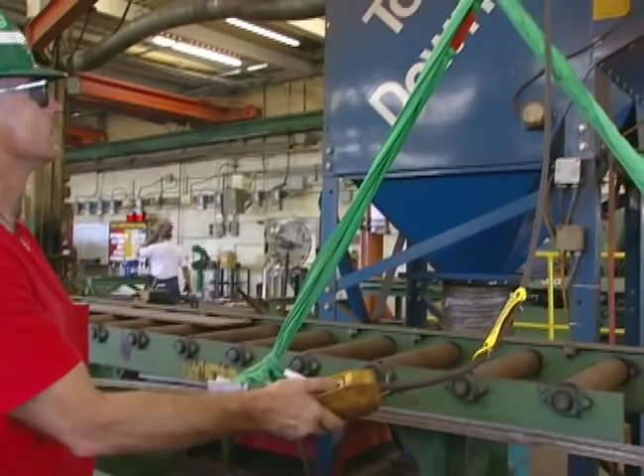Lift-All, the world's largest manufacturer of slings for the material handling industry, presents Safety in Lifting. This presentation is designed to make you more familiar with the wide range of material handling slings available to help you lighten the load, and to highlight procedures that can improve safety awareness for sling applications. In short, to provide life-saving knowledge for field personnel.

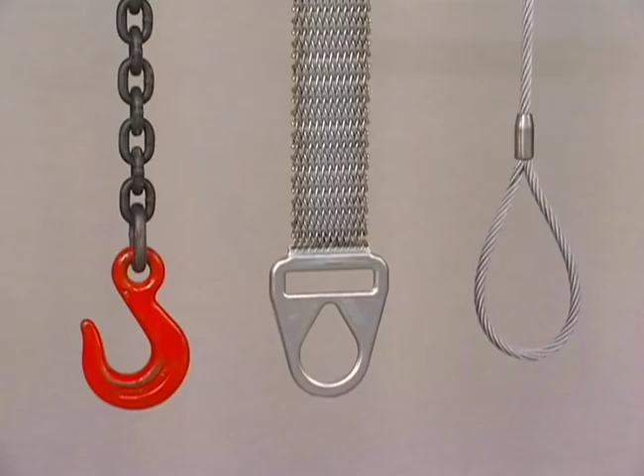Slings can be divided into two basic categories: those made from synthetic materials and those made from steel. Synthetic slings are often used where protecting the load is a major concern. They are lightweight and easy to use, making them the first choice for many applications. Two types of synthetic slings are web slings and round slings. For web slings, several types of webbing are available to accommodate the varied needs of web sling users. Most sling webbing has interior yarns that offer reserve strength in case surface yarns have been damaged.

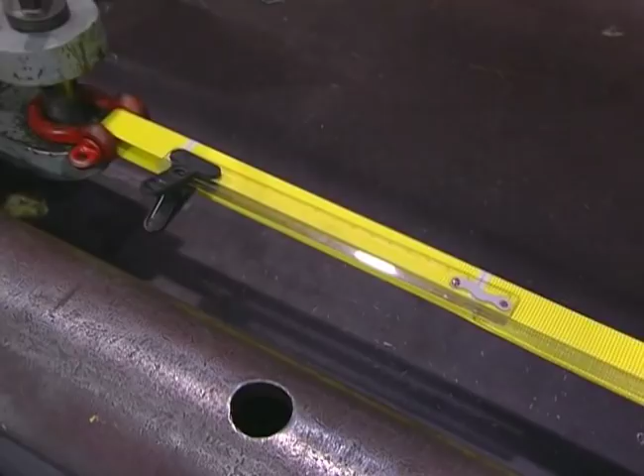Polyester and nylon are the two most common fibers used to make sling webbing. Nylon will stretch approximately 10% and polyester will stretch approximately 7% at rated capacity, both helping to dampen the effects of dynamic loading. If used in a chemical environment, contact the manufacturer for recommendations.

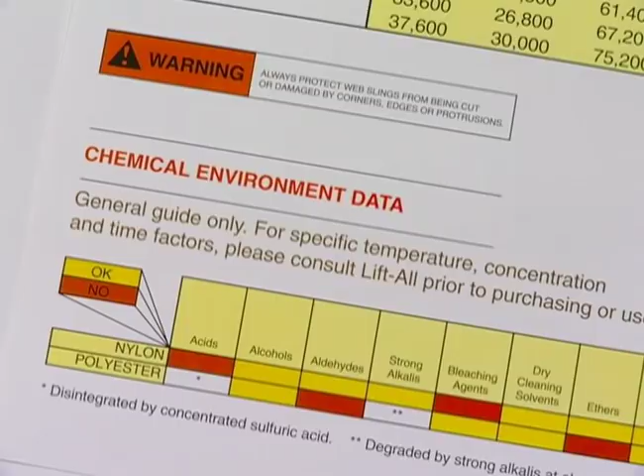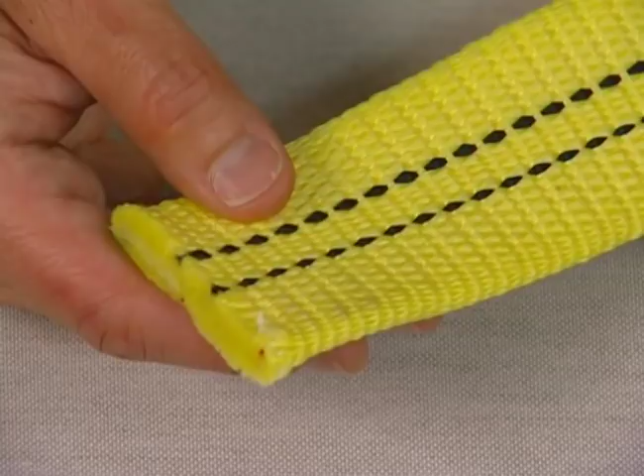Standard sling webbing is available in two strength ratings: 1,200 pounds per inch of width for standard duty, or 1,600 pounds per inch of width for heavy duty. 1,200-pound web is approximately 1/8 of an inch thick. 1,600-pound web is approximately 3/16 of an inch thick. Sling webbing is available with edge-protecting yarns to help reduce abrasion and cutting of the edge. Sling webbing is also available with abrasion-resistant yarns covering all surfaces.

Unlike web slings, all of the load-bearing fibers in most round slings are enclosed and protected by a 2-ply independent cover. Round slings are made with either polyester or aramid core yarns. Aramid core slings have the lowest sling weight per capacity of all slings, making them especially useful for large capacity lifts. Industry standard colors for polyester round slings designate specific capacities.

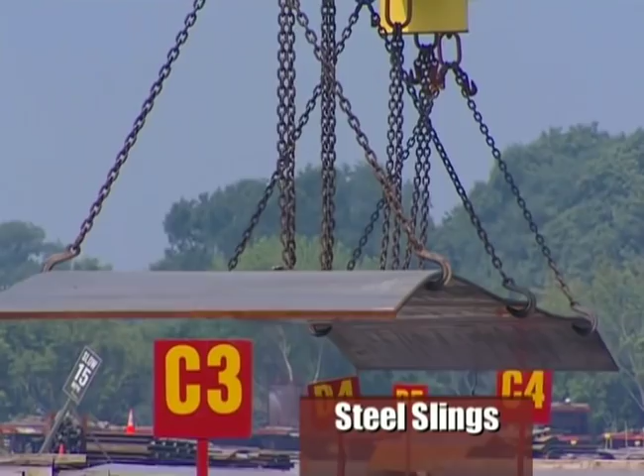Steel slings are used for rugged loads or applications where elevated temperature, cutting, and/or abrasion are a problem. They are typically used in conditions that could be abusive to synthetic slings. The three basic types of steel slings are chain, wire mesh, and wire rope. Wire rope slings are a standard in the construction industry.

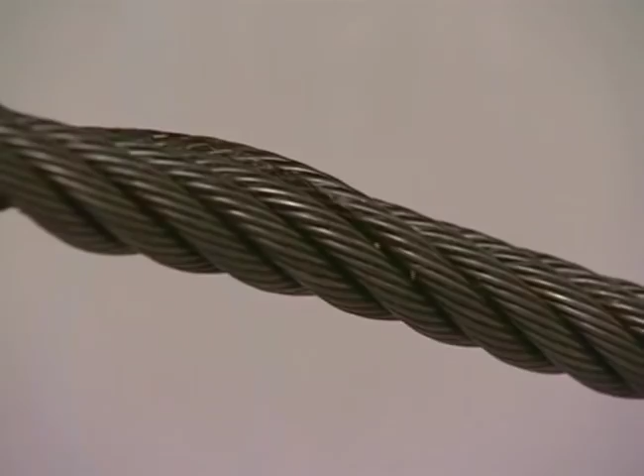Made from high-strength steel wire rope, they are available in many sizes, capacities, and configurations to meet a variety of lifting situations. The most commonly used rope is a 6x19 construction with an independent wire rope core. This rope offers good resistance to abrasion and flexibility sufficient for most applications. For greater flexibility, use ropes having a greater number of wires, such as a 6x37 class rope. Multi-part cabled or braided wire rope slings can offer an even greater degree of flexibility. For added flexibility and corrosion resistance, cable-laid wire rope slings or multi-part slings made from galvanized or stainless steel wire rope make a great choice.

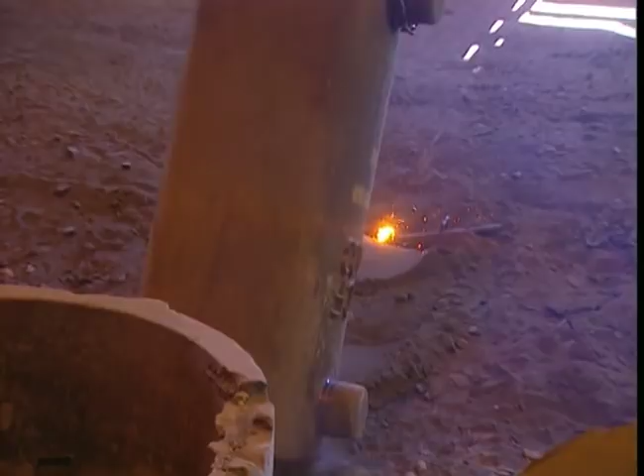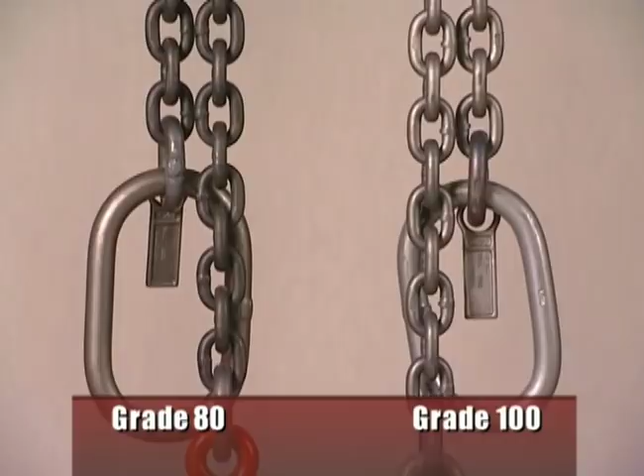Chain slings and attachments are made from alloy steel, engineered for strength and durability. They are used for the most rugged applications, including high-temperature environments such as foundries and steel mills. Alloy steel chains are the only chains recommended for lifting purposes. Two grades of chain commonly used for slings are grade 80 and grade 100. Grade 80 is the industry standard and most widely used. Grade 100 is approximately 25% stronger for the same chain diameters, allowing a lighter sling to be used in certain situations.

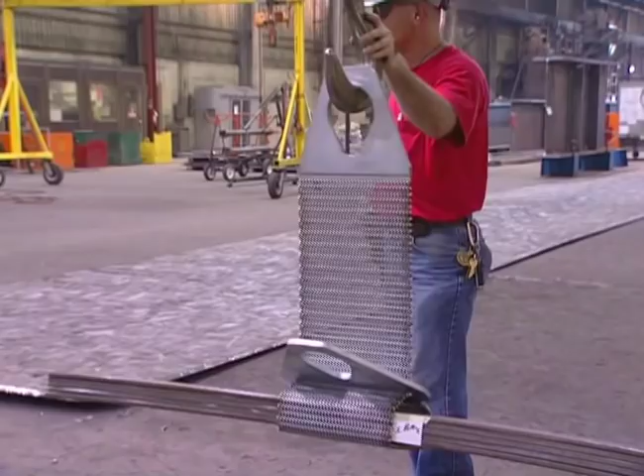Wire mesh slings are made from high-tensile steel wire, woven and fitted together to form a flexible, smooth, flat-bearing surface. Mesh slings offer good cut resistance while protecting loads from damage and are commonly used with lifting beams to handle steel bars and bundled loads.

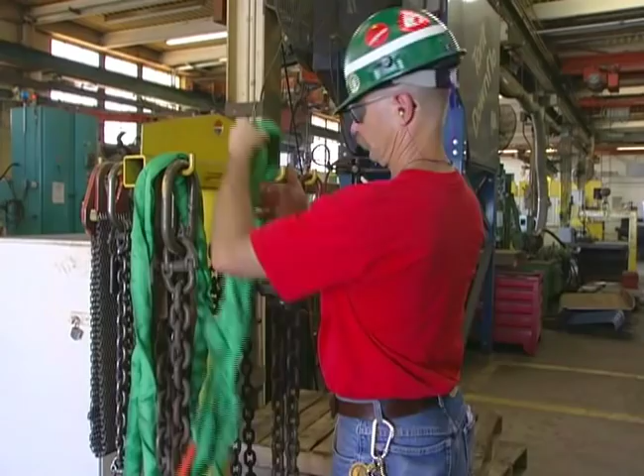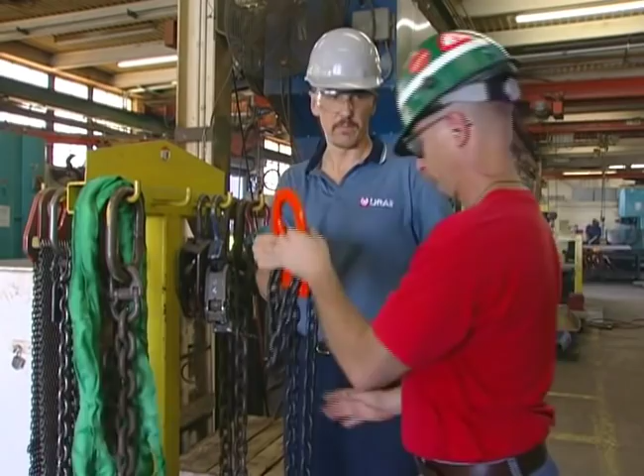Liftall slings are manufactured to the highest standards and tested for reliability, performance, and user safety. As good as these products are, it's up to you to select the right sling for each job and to use safe lifting practices. If you don't, property damage, personal injury, or even death could result. There are many factors that must be taken into account when planning a safe lift. Failure to understand and apply the following practices may result in personal injury or death. The following guidelines meet OSHA and ASME B30.9 requirements. Never load slings in excess of their rated capacity.

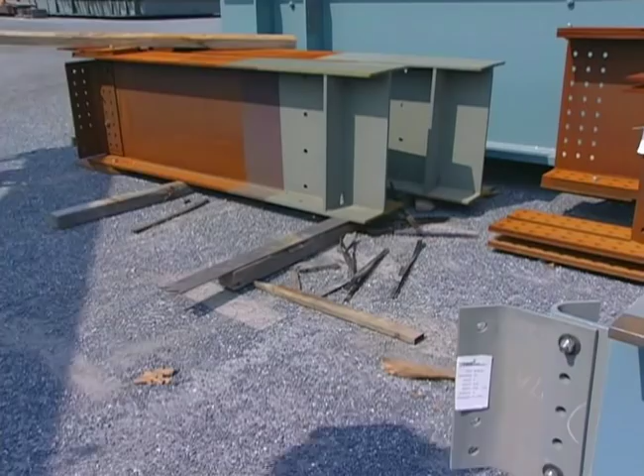An important step in planning a safe lift is examining the load. You must consider the weight of the load, its structural stability, and center of gravity. If you do not already know the weight of the load, check for identification plates, shipping papers, manufacturer's catalogs, or contact the manufacturer. If you are unable to get a weight using these methods, you may have to estimate the load weight based on volume and standard material weights. Consult your supervisor if you are unfamiliar with these calculations.

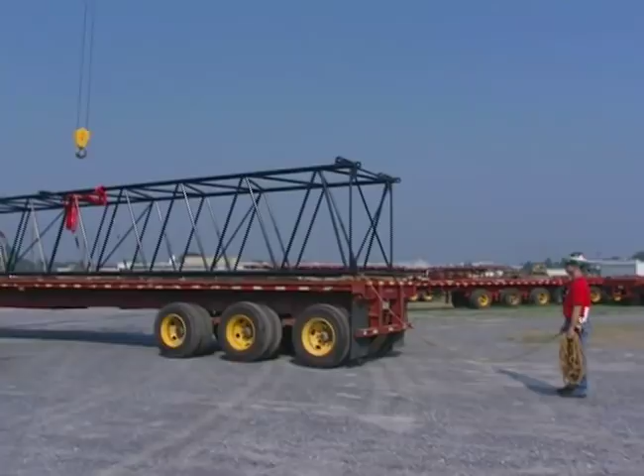Another consideration involving the weight of the load is the center of gravity of the load. If only one crane hook is used to lift the load, it must be positioned over the load's center of gravity. Failure to do so will result in the load shifting and possible loss of load control. Whenever possible, fluids should be drained from the load to avoid shifting of the center of gravity during movement.

Structural stability must be examined to avoid damage to or loss of the load. Some loads have designated pick points that are to be used for lifting purposes. If these are not available, be sure that the areas in contact with the sling will withstand the stress of the lift. Also remove or secure any loose parts.

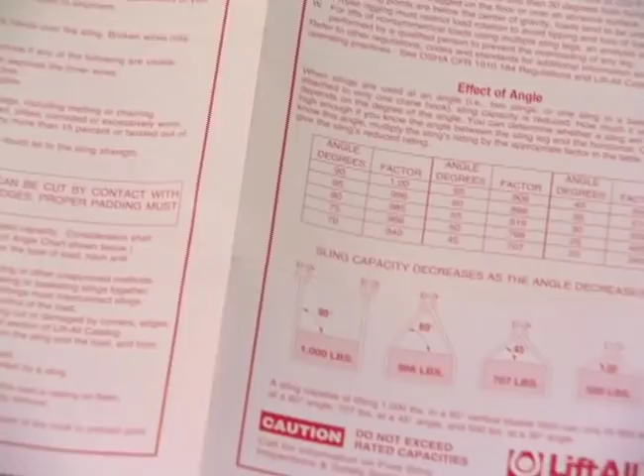Check the sling tag for important information such as rated capacities, length, material, and manufacturer. Read the warnings on the sling tag and review the instruction sheet that accompanies a new sling for specific inspection and operating practices information.

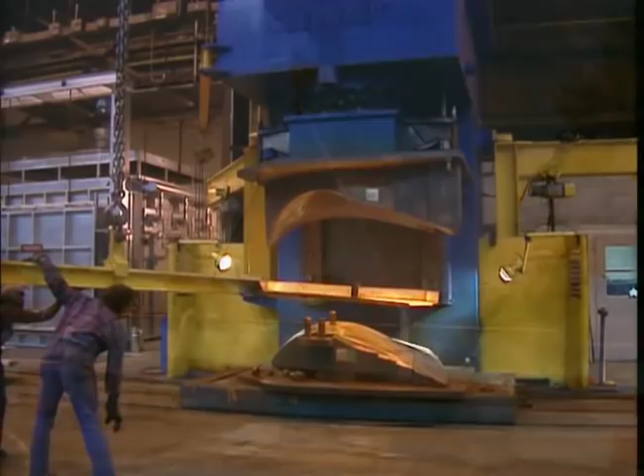An essential step prior to selecting a sling is determining how the load will be rigged. You must take into account the type of hitch, vertical, choker, or basket, and the number of slings to be used. If lifting smooth cylinders or loose bundles, a double wrap choker or basket hitch may improve load control. This will give you 360-degree sling contact with the load and help prevent the load from slipping out.

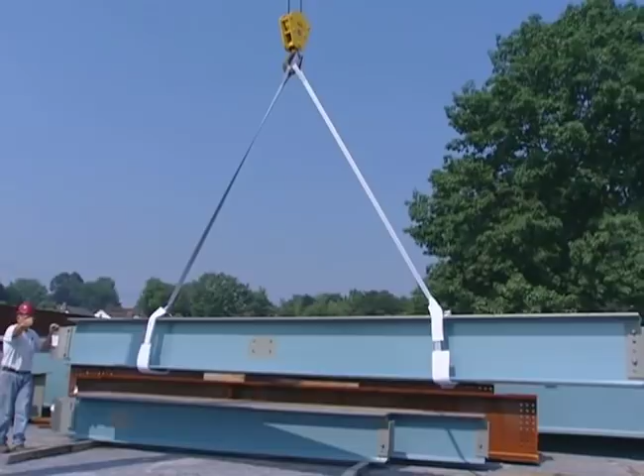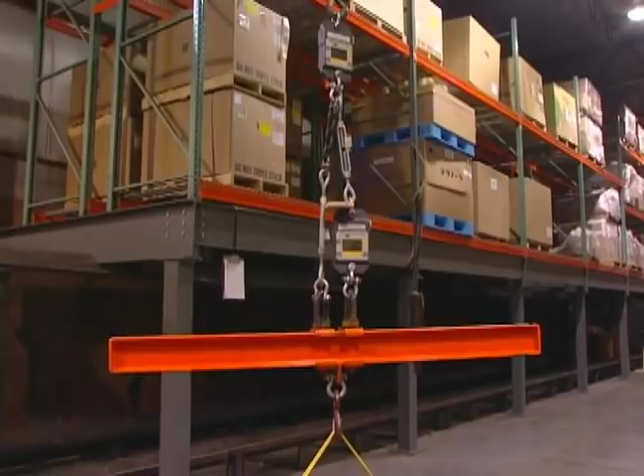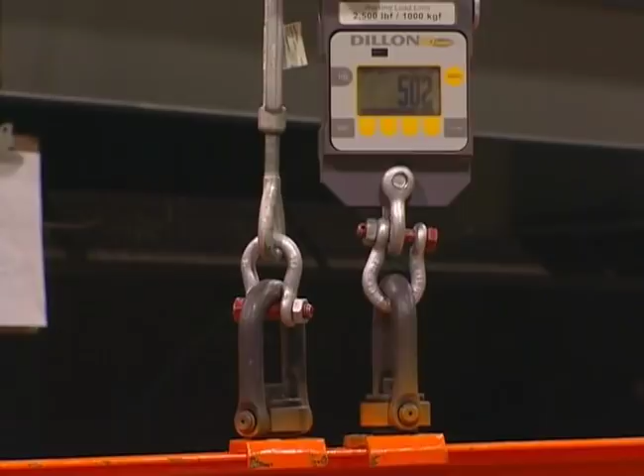When using slings at any angle other than 90 degrees from horizontal, the tension on the slings increases. To illustrate, we have installed dynamometers in line with the slings being used to lift this load. The total weight being lifted in this example is 1,000 pounds. At exactly 90 degrees, the tension on each of the two legs would be 500 pounds.

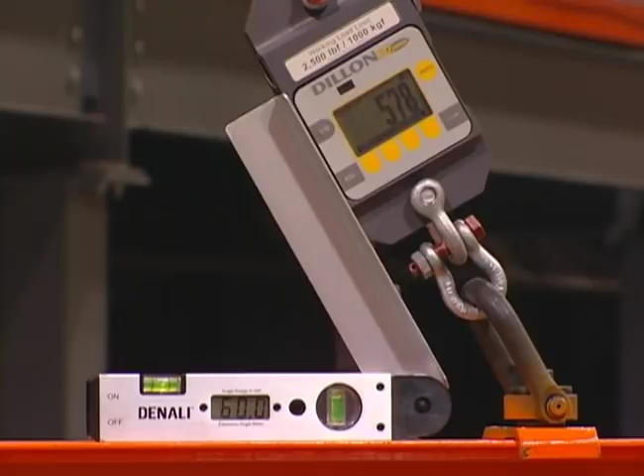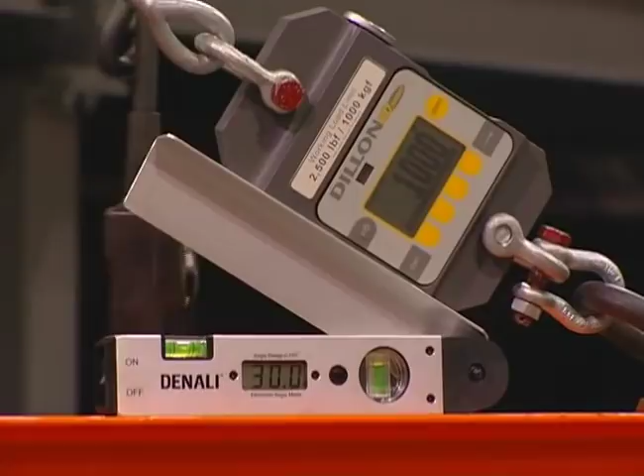As the angle is decreased, the tension on the slings increases. What was 500 pounds at 90 degrees becomes 578 pounds as the angle reaches 60 degrees, 707 pounds as the angle reaches 45 degrees, and 1,000 pounds on each sling when the angle becomes 30 degrees. In essence, our 1,000-pound load weight, as seen by these slings, has doubled with this decreasing angle.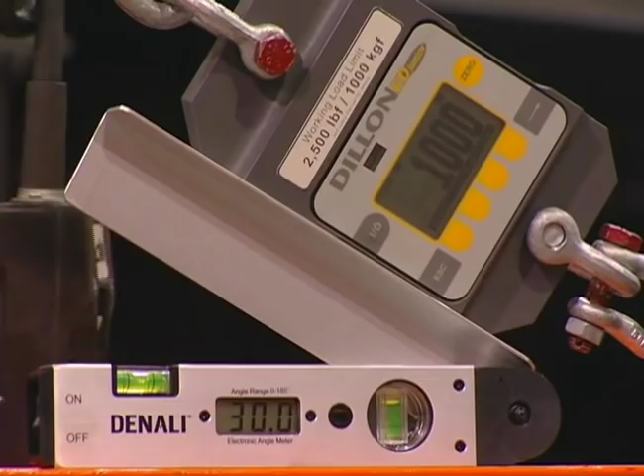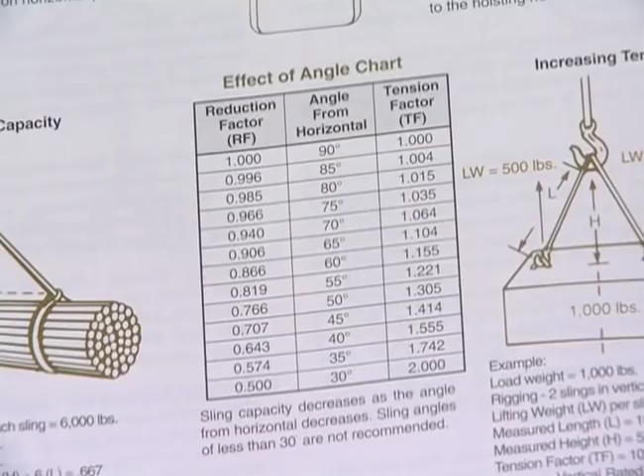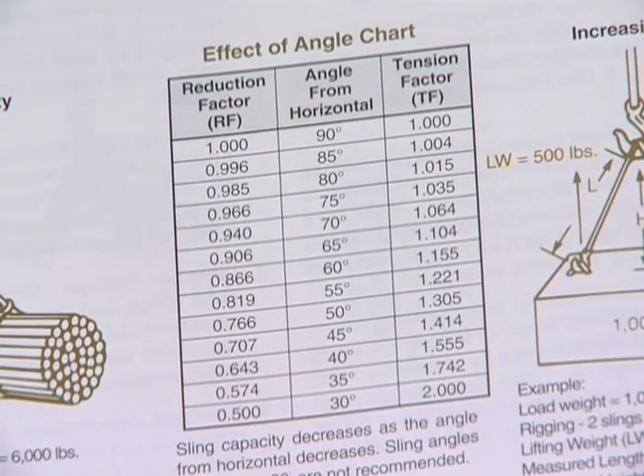For this reason, particular attention must be paid to sling capacities and load weights when using slings at angles of less than 90 degrees. Slings should not be used at angles of less than 30 degrees. Charts are available from Lift-All for calculating this critical effect of angle on sling's capacity. When in doubt, use the sling at only half of its rated capacity for the hitch being used. When multiple slings or sling legs are used, the legs may not be loaded equally. A qualified person should review the lift to avoid the overloading of any leg.

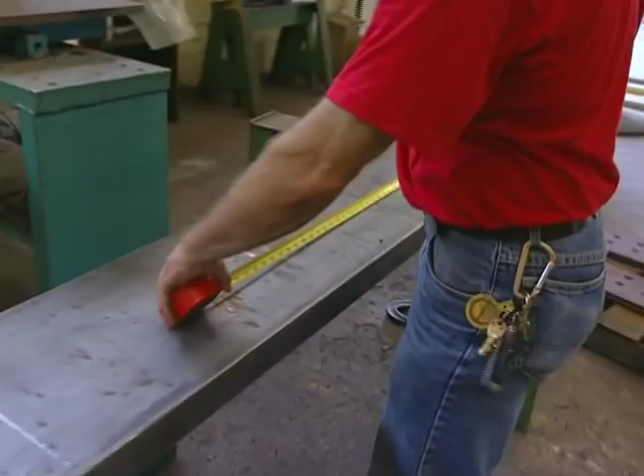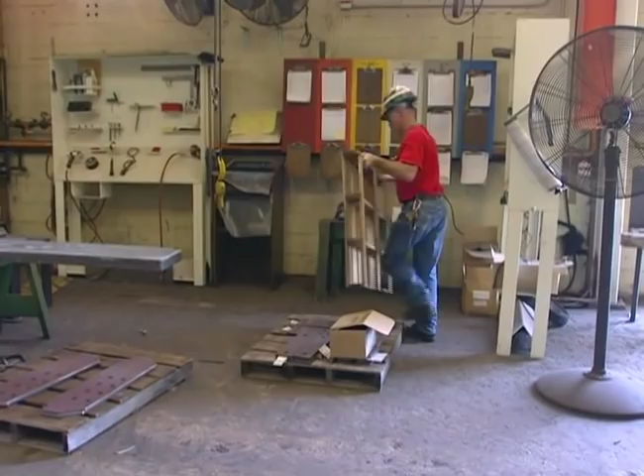After examining the load and determining the sling's rated capacity, you must inspect the area where the lift will be done. It is important that you identify the conditions and hazards of the work area and how they will be handled. Also be aware of how much headroom you have to lift the load. Check your hook travel and make sure you have a clear path. Locate electrical power lines, steam pipes, sprinkler lines, overhead conveyors, and air lines. If necessary, measure the ceiling clearances and doorways. Know in advance what lies in your lifting path.

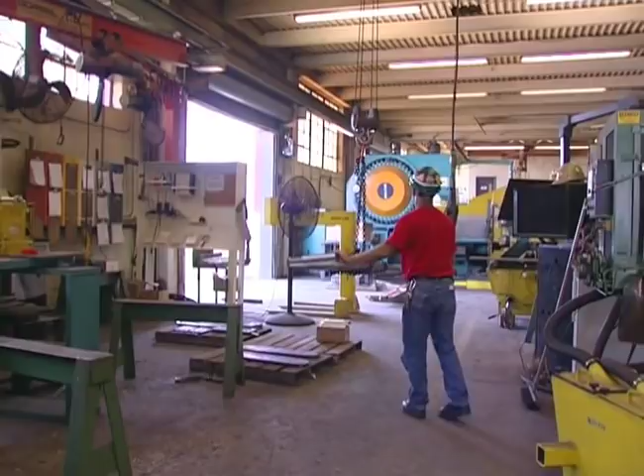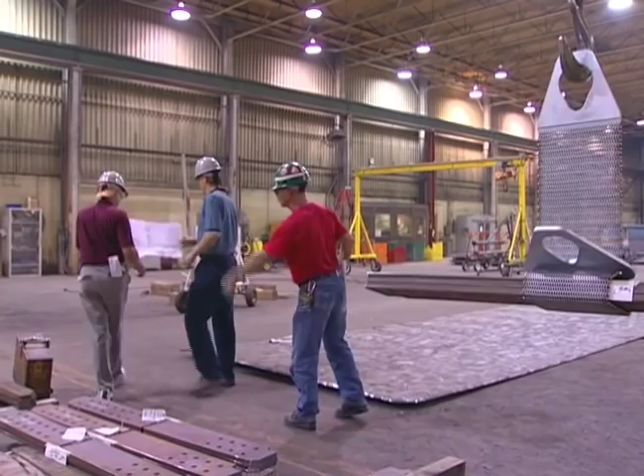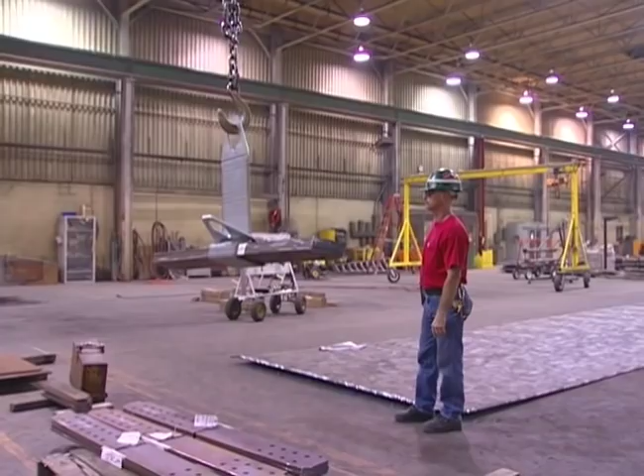Look for movable or projecting objects, slippery surfaces, obstacles you could trip over, and dips or grades along the traveling surface. Additionally, you must contain or control pedestrian traffic in and around the load's travel path. Secure your work area using approved methods, such as rope, sawhorses, warning lights, and tape. You must never lift a load over people. Personnel should stand clear of the suspended load. Tag lines can aid in guiding and controlling the load.

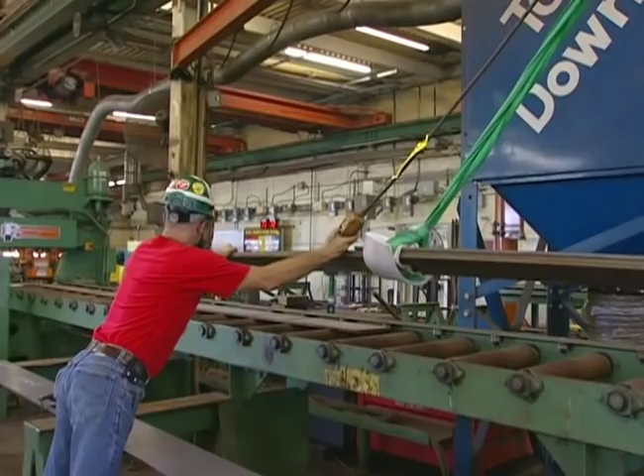When choosing a sling that is going to be used in elevated temperatures, remember that each type of sling has a different temperature limit it can withstand. Web slings and Tuflex round slings must not be used in temperatures that exceed 200 degrees Fahrenheit. Keyflex round slings with their aramid fibers may be used in temperatures up to 350 degrees Fahrenheit. Wire rope slings with a fiber core must be removed from service if used in temperatures over 180 degrees Fahrenheit. Wire rope slings with a wire rope core must be removed from service when used in temperatures that exceed 400 degrees Fahrenheit.

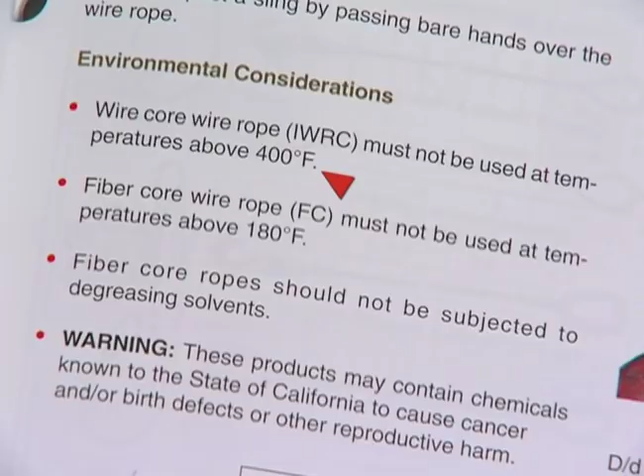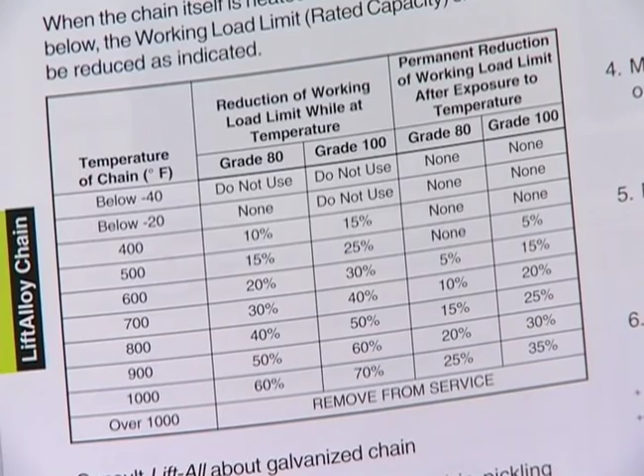Chain sling capacities must be reduced when used at temperatures of 400 degrees Fahrenheit or more. Permanent capacity reduction begins at 500 degrees Fahrenheit for grade 100 chain and at 600 degrees Fahrenheit for grade 80 chain. Never use chain slings in excess of 1000 degrees Fahrenheit. Wire mesh slings can be used in temperatures up to 550 degrees Fahrenheit.

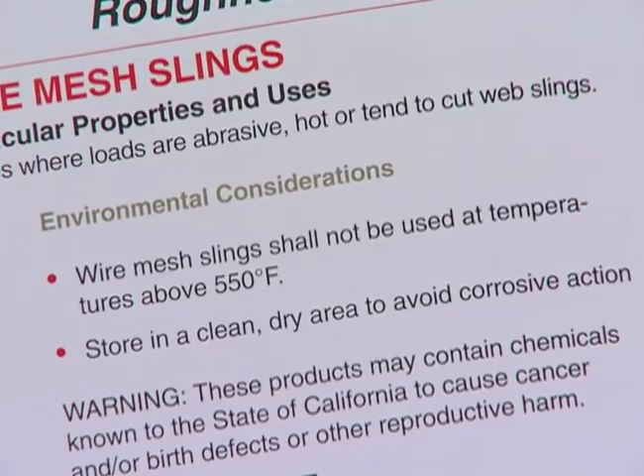Check for chemical exposure before using slings. Each sling reacts differently to chemicals or chemical environments. Sling strength can radically decrease if used in or even near the wrong chemicals. Check manufacturer's guidelines for chemical compatibility.

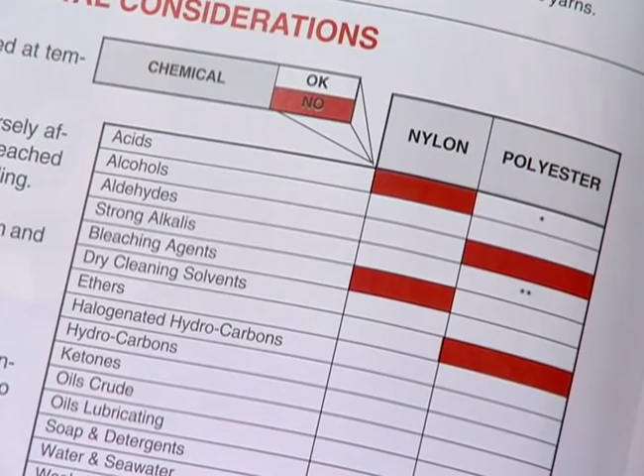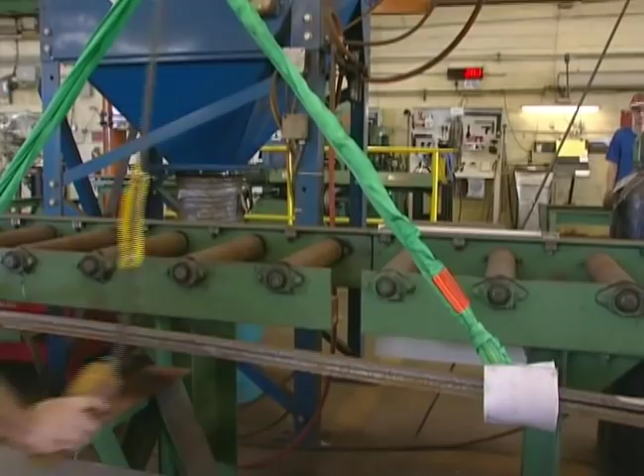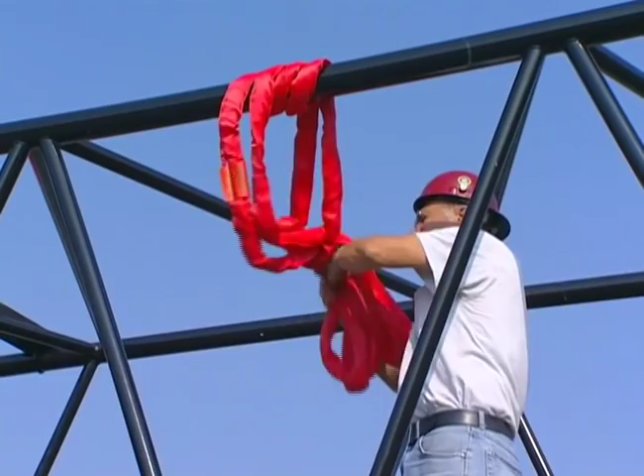Loads must be rigged to prevent movement of the sling along a load edge. Tremendous pressure exists at the bearing points where slings contact the load. Should a synthetic sling slide along a load edge while under tension, there is a good chance that the sling will be severed and drop the load. Reduce movement by using sling angles of 60 degrees or greater and by using double wrap choker or basket hitches when practical. Always protect synthetic slings from being cut or damaged by corners, edges, or protrusions.

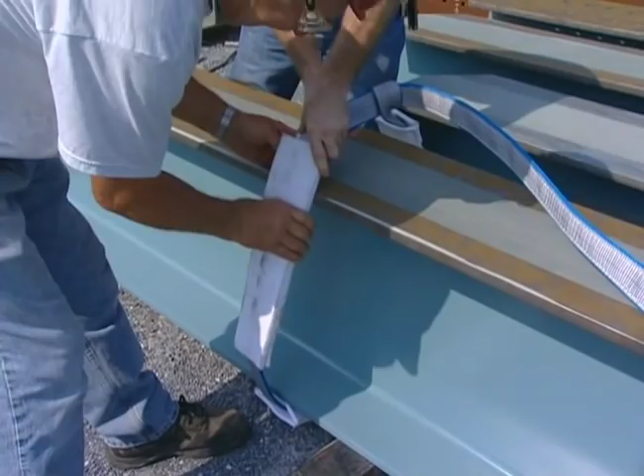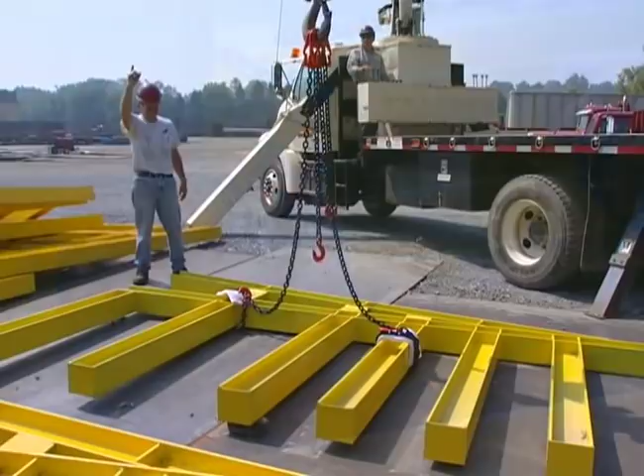Be sure to use wear pads to help protect the sling and prevent friction or cutting damage to the sling body. These protectors must fully resist the pressure created between a sling and load edges. Steel slings are less easily damaged by cutting and abrasion than synthetic slings, but pads may still be appropriate to protect the sling and/or load from damage. There are many pad styles and materials available to accommodate most applications.

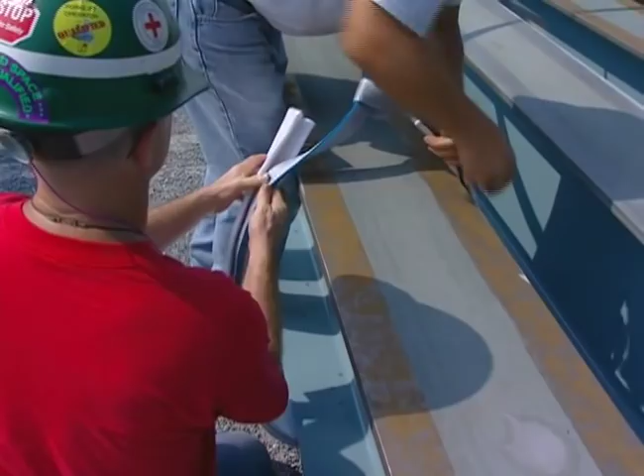Sewn-on pads for web slings might be appropriate when repetitive lifts wear specific areas of the sling. For more versatile use, sliding sleeves offer protection where needed at the time. Quick sleeve style pads can be easily applied to and positioned on the sling. These pads are appropriate for web slings, round slings, chain and wire rope slings.

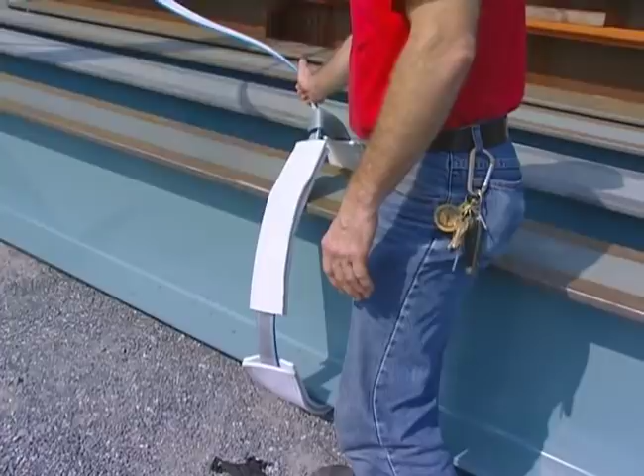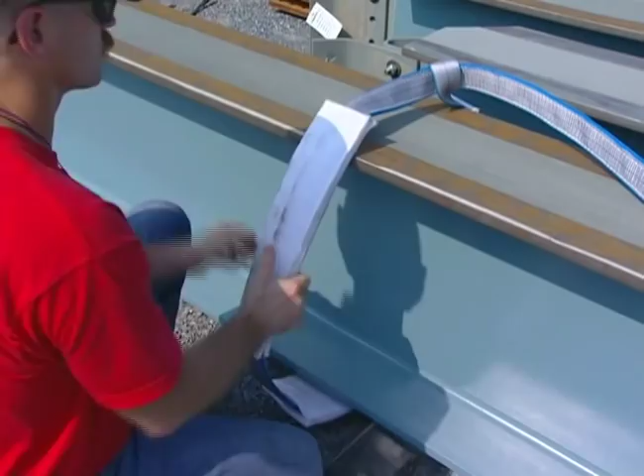There are many materials that can be used for wear pads. Some of the more popular are synthetic felt, sling webbing, and leather. If being used for the first time, the ability of a wear pad or other protective device to perform effectively needs to be verified. To accomplish this, raise the load only until it is just barely suspended, then lower the load and inspect the sling and protection materials. If damage is evident, change the type of protector, sling, or hitch and perform the test again. Repeat the process until the sling and protector have not been damaged.

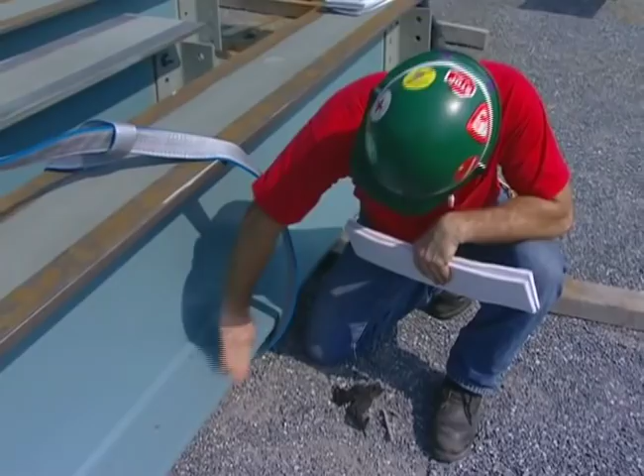OSHA regulations for slings are available online at www.osha.gov, Regulation 1910.184. Additional up-to-date guidelines can be found in ASME B30.9, the Web Sling and Tie Down Association standards, and the Lift-All catalog, website, and instruction sheets that accompany each sling.

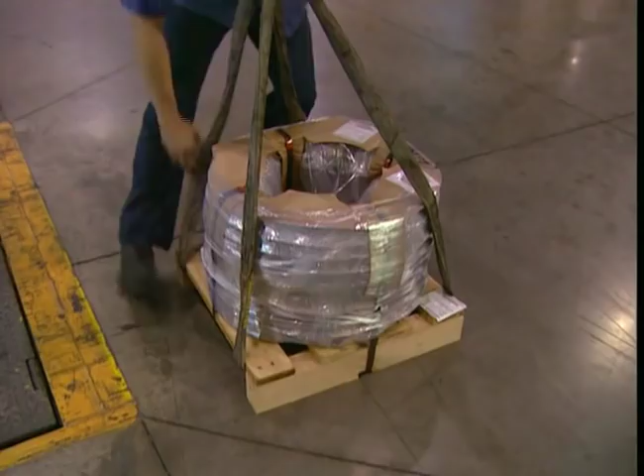The usable life of a sling can be extended by following proper care and operating procedures. All slings should be stored in a cool, dry area. Web slings should be stored away from direct sunlight. Extensive exposure to ultraviolet light can damage web slings, decreasing their strength. When using slings, never rest loads on top of them and do not drag them on the ground. Do not point load the hook. Make sure the sling, attachment, and load does not snag on anything in your lifting path. Do not twist, kink, or knot slings.

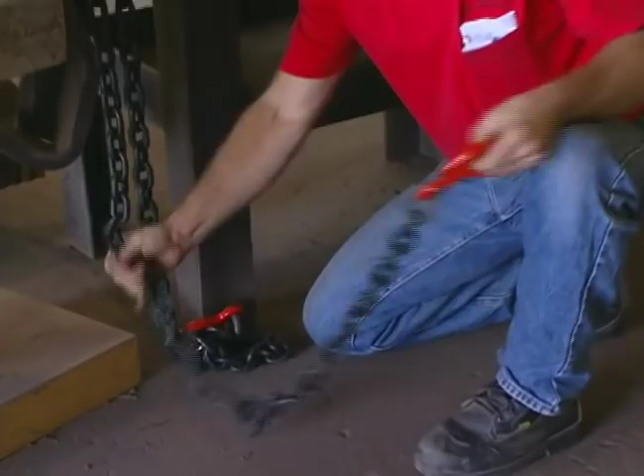Equally important to the proper use of slings is guarding against personal injury. Always keep your hands clear of slings and loads and stand away from suspended loads. Also, never ride the sling or the load.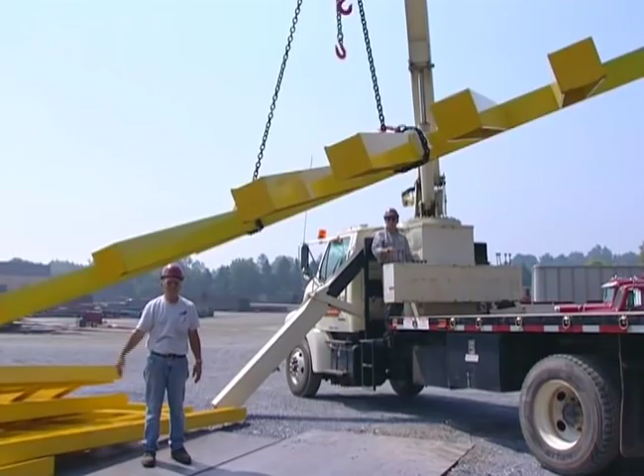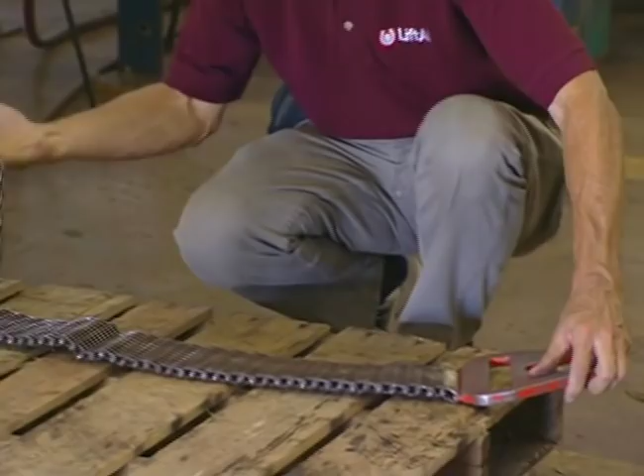Lift-All operating procedures require that you always inspect slings before each use. OSHA states that the sling and all fastening and attachments shall be inspected for damage or defects by a competent person designated by the employer. Damaged or defective slings shall be immediately removed from service. In addition to these requirements, OSHA and ASME specify that chain slings receive a thorough inspection at least once per year, and that the employer maintain a record of the most recent inspection.

As you recall from the first part of the program, slings can be divided into two basic categories, those made from synthetic materials and those made from steel. There are two varieties of synthetic slings, web slings and round slings. These slings should be removed from service at once when you find cuts, holes, knots, tears, snags, abrasions, damaged fittings, melting or chemical damage, worn or broken stitching, or missing or illegible tags. If any of these problems occur with your synthetic slings, they should be removed from service immediately.

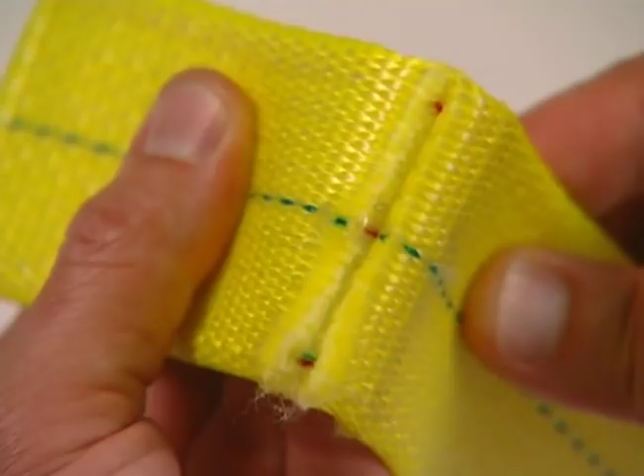An additional indication that a synthetic web sling has been damaged is exposure of the red core yarns. A sling in this condition should be removed from service immediately. Tuflex round slings should be replaced when cover damage is sufficient to expose the load-bearing inner yarns.

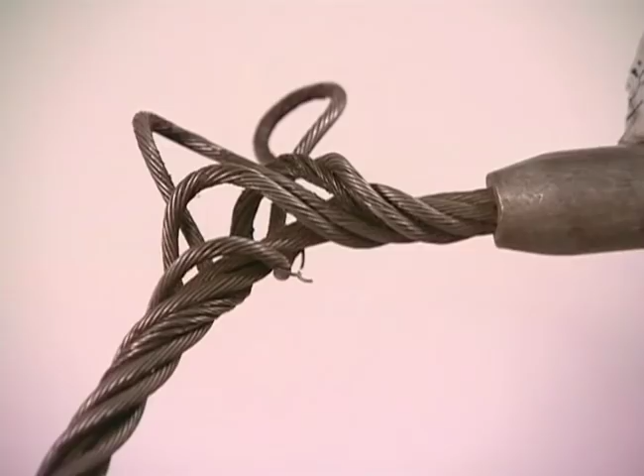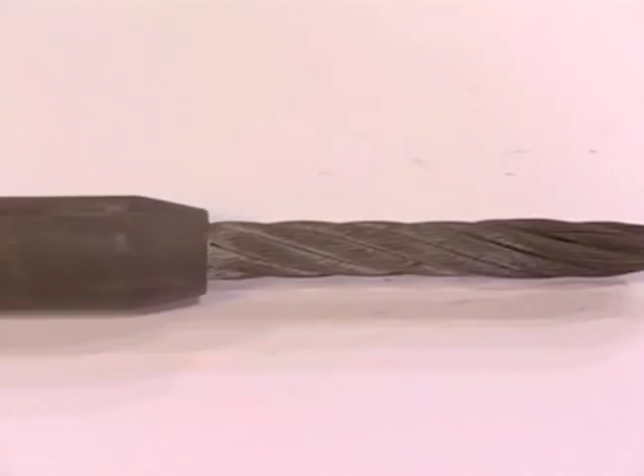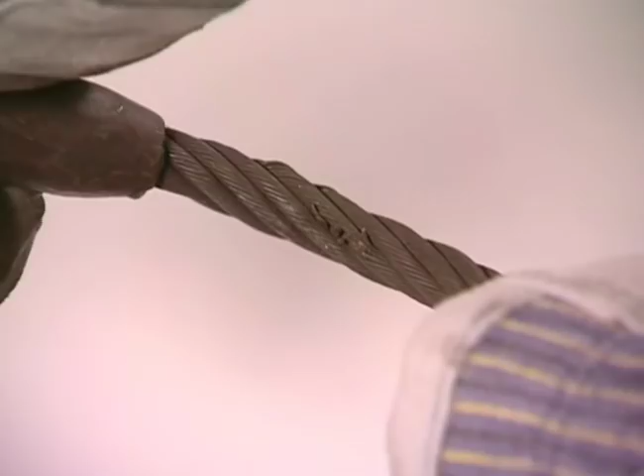The three basic types of steel slings are chain, wire mesh, and wire rope. Per OSHA and/or ASME instructions, wire rope slings with the following conditions must be removed from service immediately: kinking, crushing, bird caging, wear, corrosion, damaged sleeves or end fittings, missing or illegible identification, or heat damage. Wire rope slings damaged by heat can be difficult to recognize. A good indication of damage is absence of lubrication or discoloration. Another common cause for wire rope sling rejection is broken wires. 10 broken wires in one rope lay, or 5 broken wires in one strand in one rope lay, is cause for rejection.

Chain slings must be removed from service immediately when they have one of these problems: wear, nicks or gouges, cracks or breaks, elongation, twisted or bent links, weld spatter, lack of component flexibility, missing or illegible identification, unauthorized or makeshift repairs, or excessive heat damage resulting in severe discoloration. See manufacturer's recommendations for specific rejection criteria.

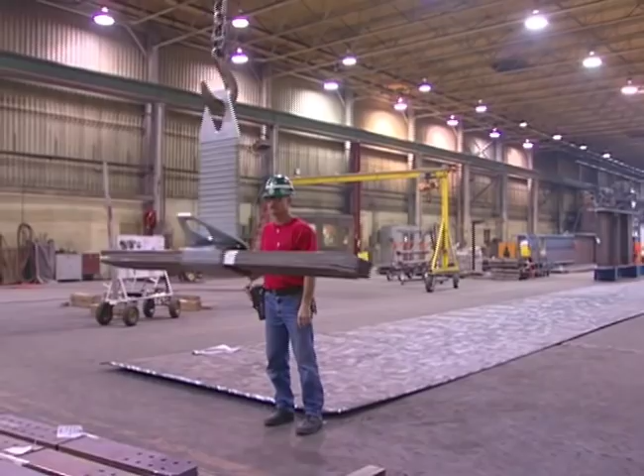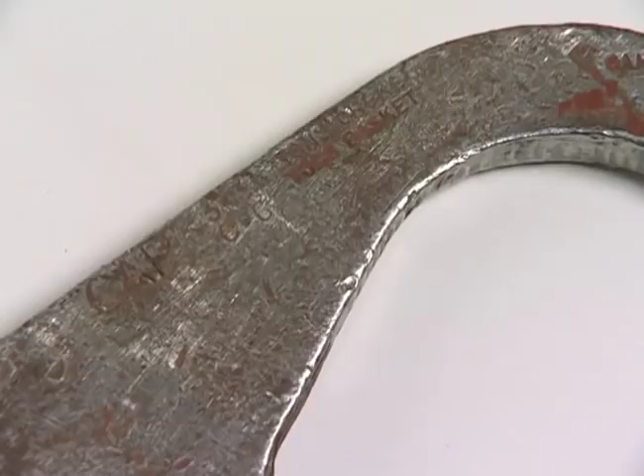The following conditions on wire mesh slings indicate they must be removed from service immediately: broken welds or wires, abrasion, corrosion or heat damage, missing or illegible identification, reduced flexibility, or field repairs.

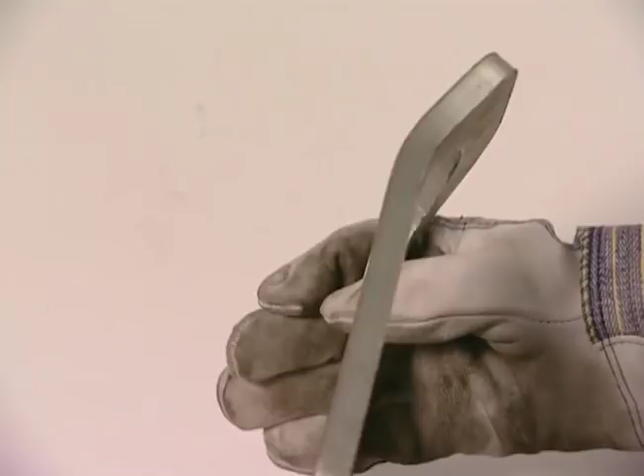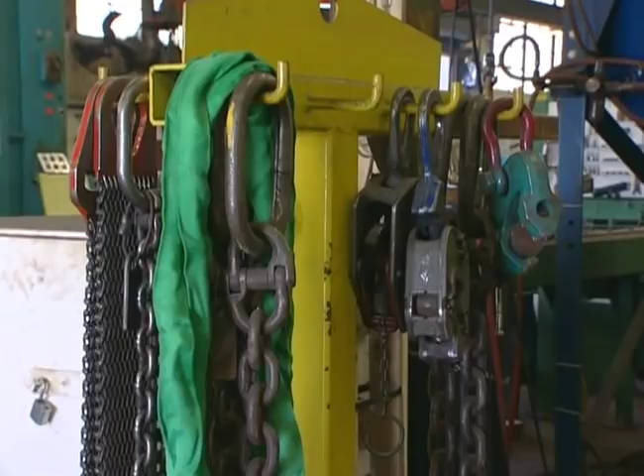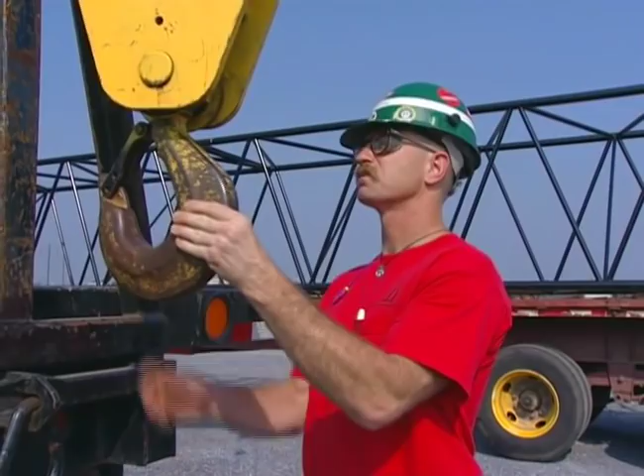The safety inspection must include end fittings and attachments in both the synthetic and steel sling categories. According to OSHA regulations, end fittings and attachments must be replaced when they show any of these problems: cracks, distortion, or wear. If a hook latch is present, it must be in good working condition, or it could prevent the sling from working properly. Slings and their end fittings that do not pass safety inspections should either be destroyed or sent back to the manufacturer for further evaluation and possible repair. Never attempt to do the repairs yourself.

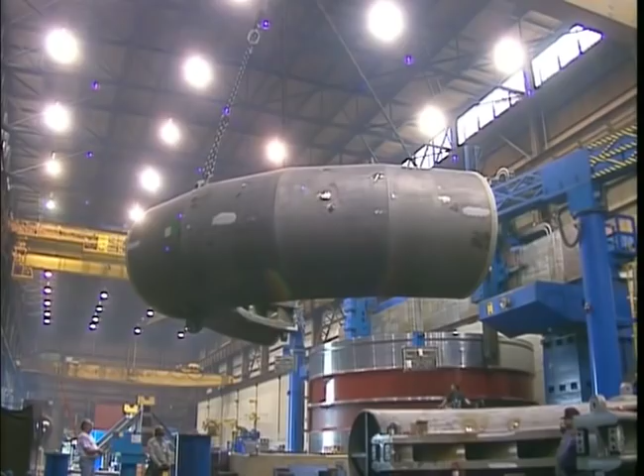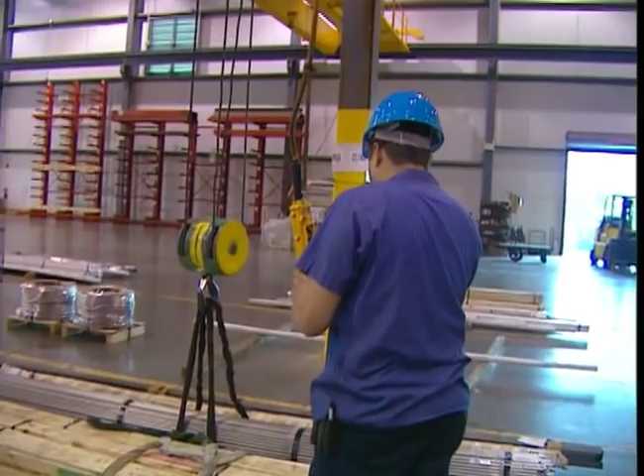Damaged slings and their fittings should never be used in any lifting situation. Web slings, Tuflex round slings, and wire rope slings cannot be repaired. However, undamaged end fittings and attachments can be returned to the manufacturer for possible reuse. Chain and wire mesh slings can be repaired by the manufacturer. We recommend that any reused parts or end fittings be proof tested and certified. If you follow the guidelines in this presentation, not only will your lifts be more effective, but much safer, and the life you save may be your own.